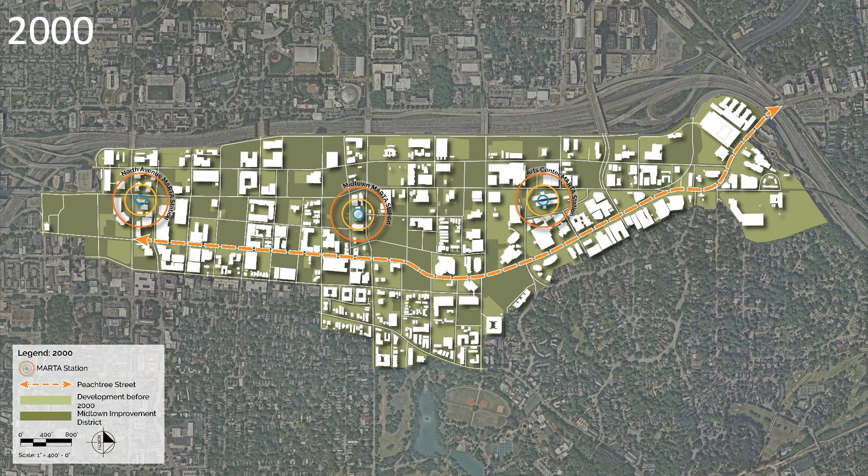So when I started working on Peachtree back in, I guess it was 1997 at this point, the street was very different, right? We were doing a project that was about putting sidewalks together. We were doing a project about creating a thread that began to identify place. And what we've seen, and you've all witnessed probably, is over this last 23, 25 years, that there's been a lot of growth that's occurred throughout the district.

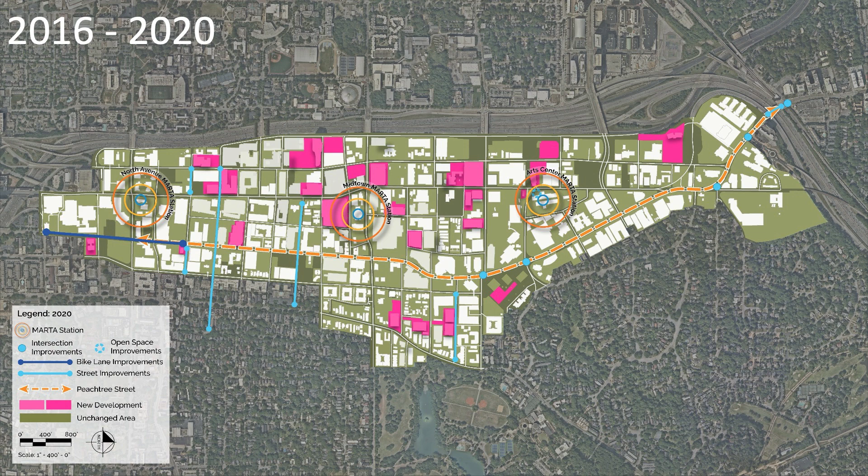And I'm just going to flip through these really quickly because it's not really that relevant when something happened, but kind of where we are now. So we're at a very different point in time than when we originally looked at Peachtree.

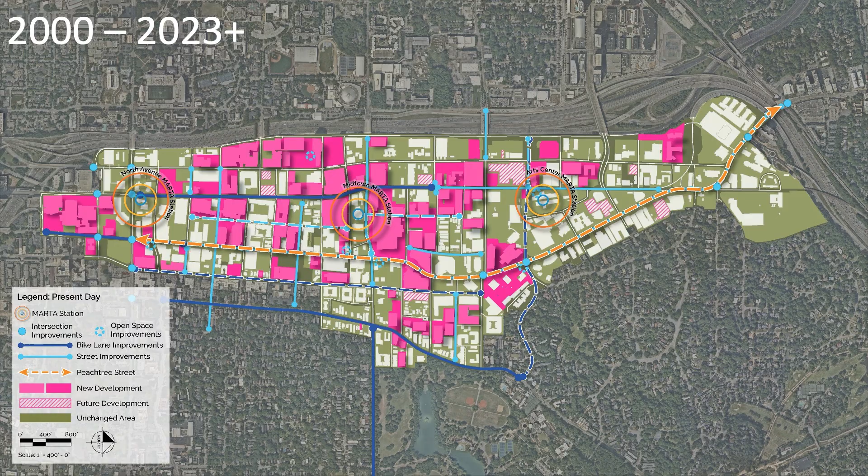A massive amount of development has occurred, but there's also been a lot of investment by the Midtown Alliance within the district, creating a lot of infrastructure systems. And we're now coming up on a point in time with Peachtree where it's a good moment to look back.

And it's getting closer to a point in time where you would expect a more vibrant streetscape, a lot more people out on the street on a more regular basis. And one of the questions that we asked initially is really, where are all the people?

In a lot of ways, Peachtree has this cyclical event time, right? So it's people going to work, people going to lunch, people coming back from work, people walking their dogs. Those are those cadences, that rhythm of Peachtree, but there's not this common thread that there are a lot of people out on the street. And there's a number of different ways that we could look at this. The rise of convenience might be something that's diminishing people being out on the street.

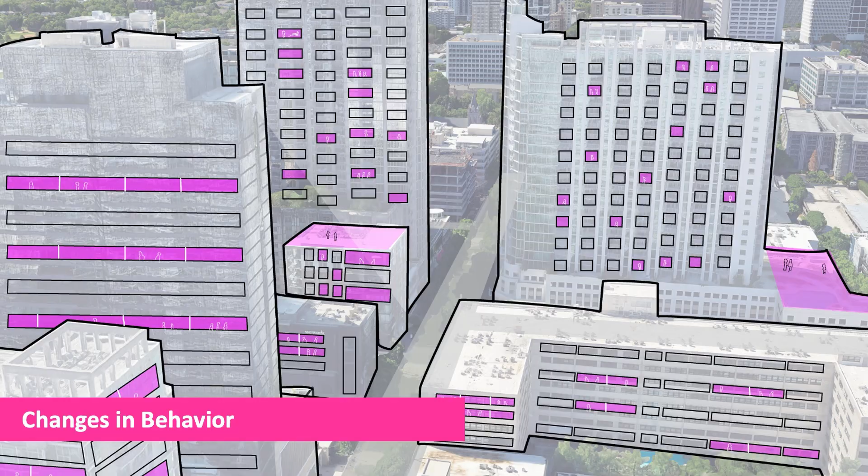I took this picture walking up here to actually check out the space, and there's 5 Uber Eats drivers picking up stuff from Fresh to Order, along with an Amazon truck delivering something from halfway around the world 6 hours after someone asked for it.

There's also changes in behavior, right? The pandemic modified a lot for us. So there's a lot of work from home attitude. There's maybe less people going to work. There's a lot less participation in the public realm that way.

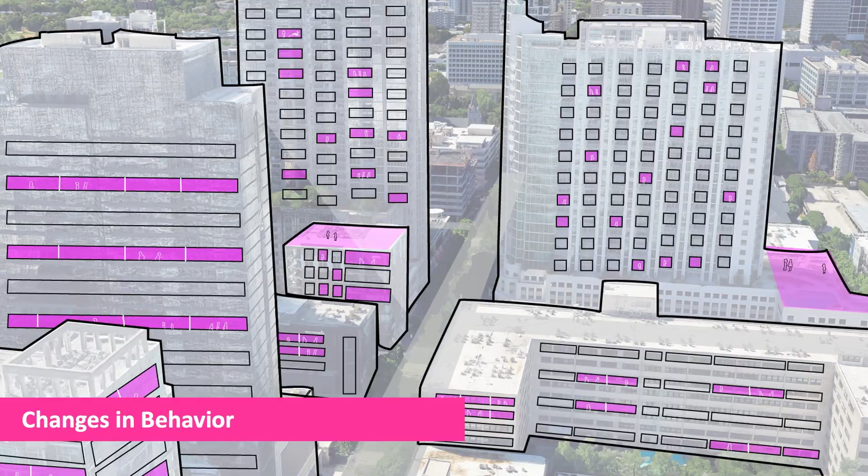There's also some hostility in the edges out there. Dan took this picture. I love it. It was right out in front of AT&T near 5th Street. There's 5 signs right there that tell you all the things you can't do in that space, which is fascinating because I've got an empty retail space and an empty retail space that are directly adjacent to this.

So some of this hostility is really opportunity. It's like, how can we look at those storefronts and look at this space and figure out a way to fill those gaps and create more energy and life?

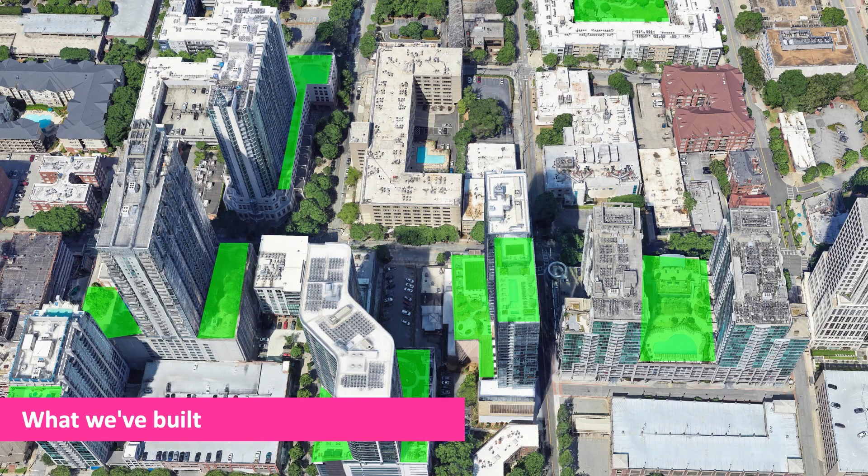I'd say there's also an issue with the way we built Midtown, right? So the common experience for a lot of people in Midtown is, I'm walking down a street, it's retail. Next thing you know, I've got 6 stories of parking before I get to a residential unit. And that's where people are at. We've got highly amenitized sky parks throughout the district

that almost make it where you don't necessarily have to leave your building, right? I can get everything delivered to me. And I've got all this great stuff up here. Why would I ever want to come out to the street? And that's really the question that we're going to be asking you guys tonight: what is going to bring us to the street?

Sustainability, which is a conversation that I'd love to have with you guys this evening because it means so many different things. That's not seen as something that's really reflected within the community itself. And then something that also came out of the Public Life Action Plan is really the empty storefronts, right? It's the shopping and dining options, night spots.

Those things that you would really expect to be able to take off with the number of residents we have here, along with the daytime population that comes in for work. Family friendly is another thing that I think we can hit within the public realm as we talk about these opportunities.

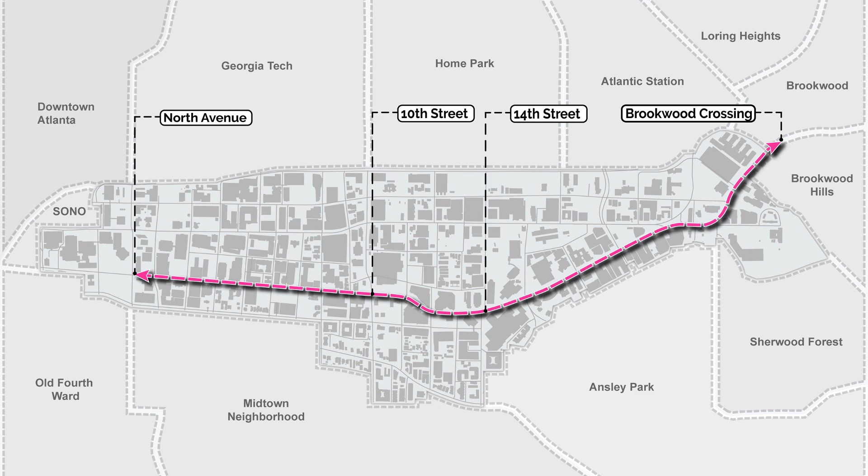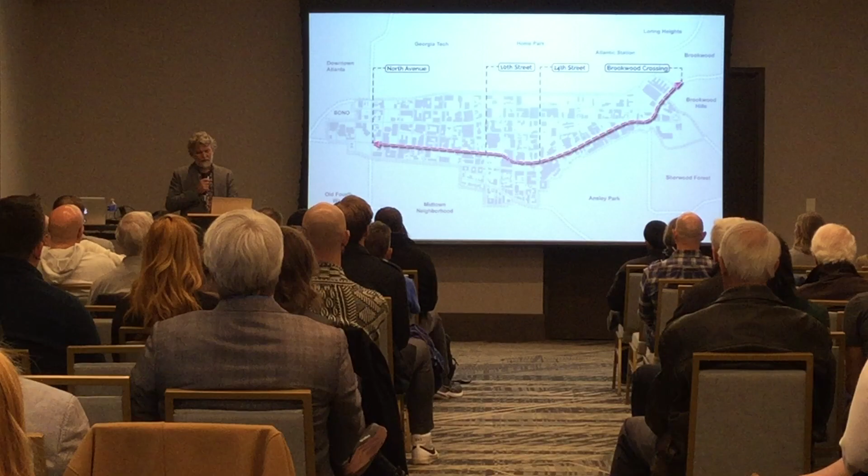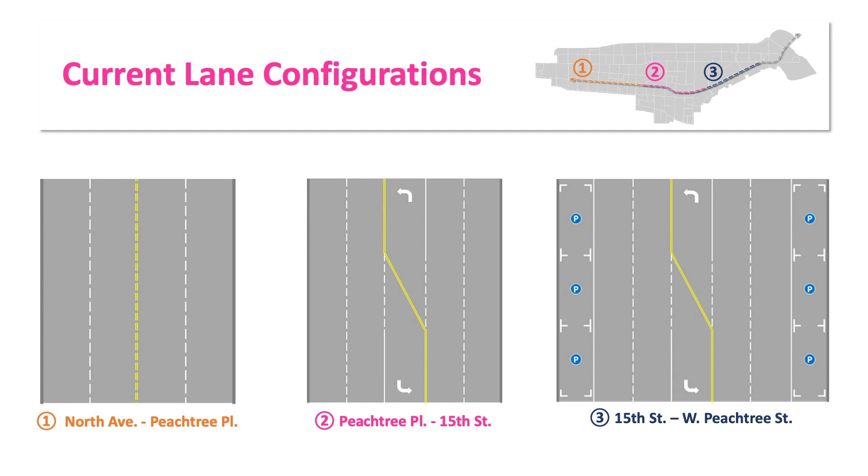So in broad terms, our project is really looking at the Brookwood crossing at 85, at the north, all the way down to North Avenue. And we're gonna truncate this a little bit, because once we get north of West Peachtree, we get into a little bit of a strange land with GDOT and some other operational things. So for simplicity, we wanted to really focus from West Peachtree southward. And these are the current lane configurations that we have throughout the district. Not all of them, but in general terms, this is the way the road is put together, right?

So basically from North Avenue down to Peachtree Place, we've got 2 lanes in each direction. We've got a 4-lane road. Once we get north of Peachtree Place, we pick up a center turn lane most of the time. Once we get north of 15th Street, then we start to add on-street parking.

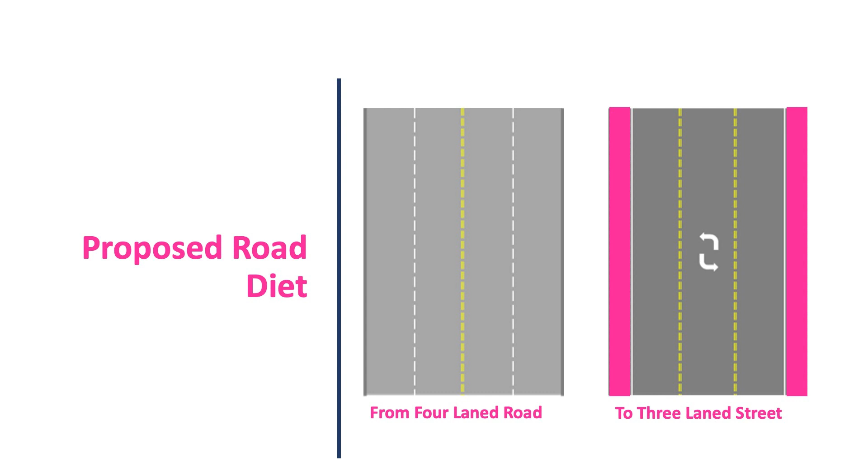So what we're talking about tonight, and what we found within our early analysis, is that there really is an opportunity to put Peachtree on a diet. So going from a 4-lane roadway, 2 lanes in each direction, to a single travel lane in each direction with a center turn lane. This is supported based on the volumes.

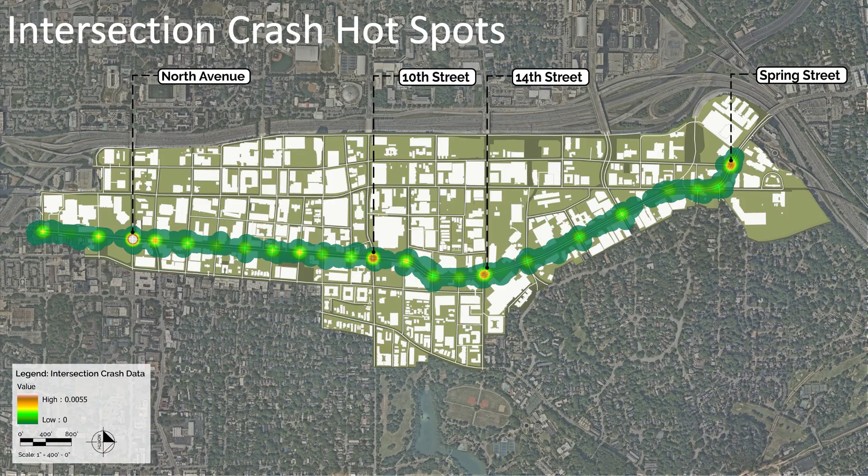It's supported based on the facts that we need to slow traffic down and we need to create a safer condition throughout the district. Now, that's a generic cross-section. We need to look at all the intersections too. There are a lot of different ways that we need to improve safety conditions, but in broad terms, this idea of a 3-lane cross-section is what we're looking at.

This is actually how I got hit by a car in Midtown. And I don't know how many people here have been hit by a car in Midtown. It's not fun. I'm sure many of you have actually been close to getting hit by a car in Midtown. So this really is an inherently dangerous condition.

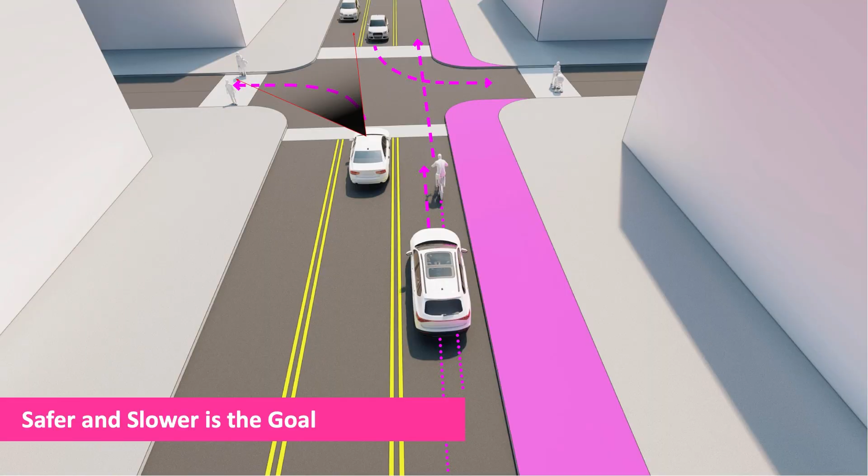The advantage, once we look at going to a 3-lane situation, you'll note that the illegal loading isn't happening here anymore. The supposition and the thought is, if I'm going to be able to park on a curb lane and not impede someone behind me, then I'm going to do it, right? No one's going to stop me. If all of a sudden I'm blocking traffic, that's not something that I feel free to do.

As soon as I align the 2 left turns together, what you end up with is a better situation where I can monitor not only the oncoming traffic to hit that gap, but I can also pay attention to the pedestrians in the crosswalk. So this really is an approach we're taking for the project. We've got the ability to really take Peachtree and narrow it down, which then really asks the question, what can we do with that extra space, right?

So if we think about 4 lanes to 3 lanes in this portion of the district, that's 10 feet, 15 feet if you include the furniture zone. Once we get further and further north, we're picking up more and more space. So it's more and more opportunity. And with that opportunity really is where we're going.

So you've probably noticed that you had some postcards on your chair when you came in. One of the things that we would like for you to do as you hear some of the conversation that Michelle and Darlene are about to take us down, we'd love to have you jot down notes. We'd love to have you tell us what it is that would bring you back to Peachtree to spend time, not just to walk down the street, but to physically spend time. And then other ideas that you may have, great places from around the world, different things that you feel are really missing from the streetscape in Midtown.

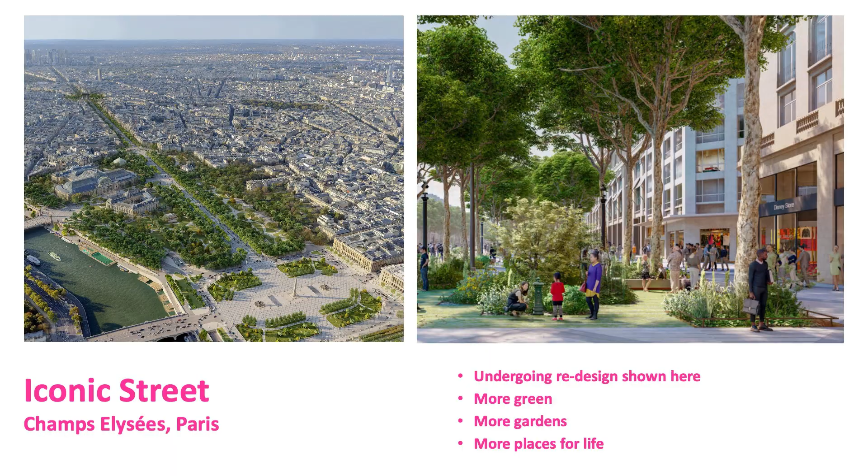So very quickly, I'll just talk you through. We have put together a few examples of streets. There's no one street that is the exact replica that we would ever promote or suggest that we do here, but there are things that we can learn from other places. And we'll run through these very quickly and just highlight a couple of thoughts, but also wanted to ask you as you're listening to jot down if there's a great street or experience or place here in Atlanta or in your own travels that you can share with us that we can learn more from.

So of course, many folks know the Champs-Élysées in Paris, often thought of as an iconic street. And what you may or may not know is it is currently also being re-looked at. And there are great aspects of that street that I'm sure they will not change, and they'll work to maintain the sort of beautiful, symmetrical kind of grand boulevard. But they're looking right now at how to integrate essentially smaller scale spaces, kind of literally at the street level. In a way, you recognize that street for the grand trees and the big moves. So ideas now are being developed on how to invite active life, integrate green and gathering, and it's not wiping it clean, it's adding that in. So that's something we can think about.

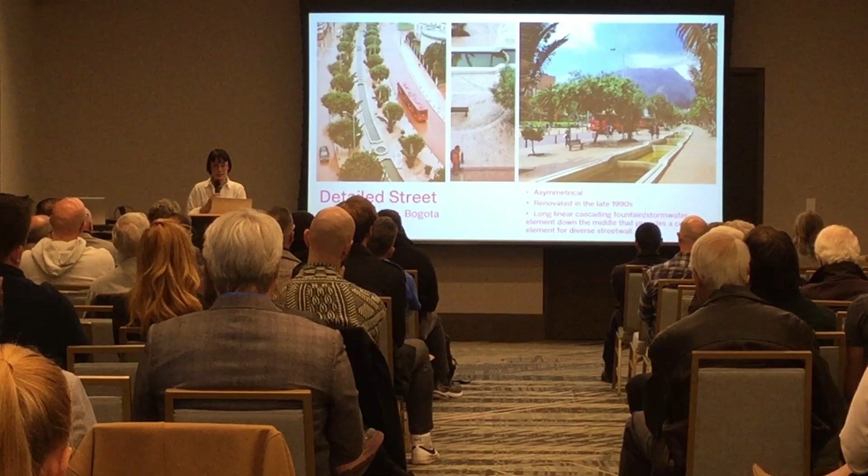This street maybe looks at first glance like it's a sidewalk or just a pedestrian way, but what's fascinating about this is there's this very intense and beautiful planting and designated walkway. On the perimeter of this are kind of standard drive lanes where traffic is able to move, but you feel like there's a place that is a little bit different and really invites a different kind of character of scale and vegetation.

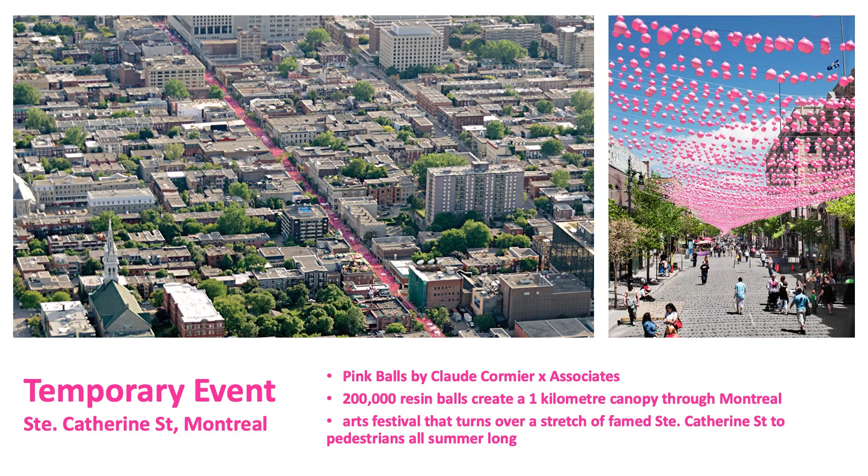And then this last one is kind of looking at that idea of continuity and also inviting culture and energy. So this is an example in Montreal. Continuity doesn't have to be about making uniformity in every aspect of the street, but here you see these kind of what we call the pink balls overhead, which are creating a strong identity, a sense of joy, and responding to this particular neighborhood and reflecting the dynamism of that neighborhood. It creates a sense of continuity, while all along the street there's lots of different activity and different energy happening.

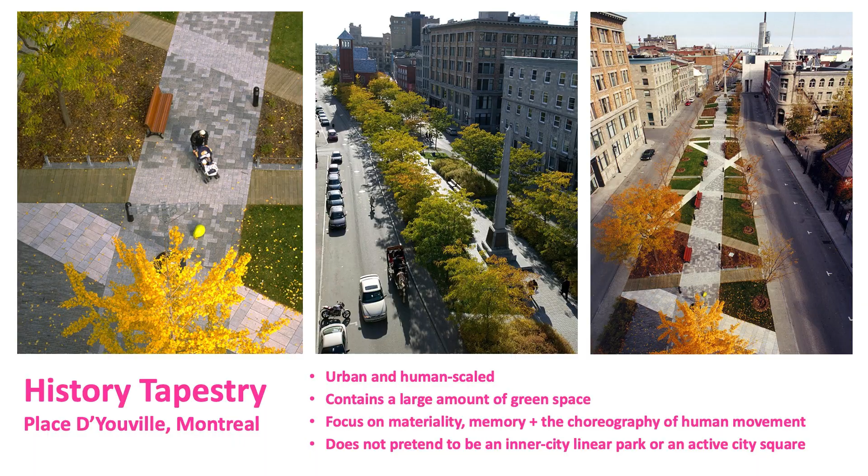And a little bit along those same lines of thinking, there's different ways to bring continuity and celebrate history or culture. And so this is our last example here. There's many more that I hope you share with us. But this one, in a sense, was kind of thinking about this tapestry or a way in which you might introduce a palette of materials, whether that's paving or planting, that can act in different ways and really respond to the immediate context, but also add up to something bigger, something that you recall or you remember or you understand really ties the place together.

So please, again, we're just going to keep asking you for this. We have ideas to share, but we also are very early in this process, and so if there's a place, whether it's a whole street or just a moment along a street that you think of, that you remember, we'd really love to hear about that and learn about that from you.

So now I'll hand it to Darlene. Thank you.

So when we worked with Eric's office, we felt like we were a really good match. We're both multidisciplinary offices, but they took on the charge of describing the quantitative metrics of the street and how this will work. And we had the pleasure of looking at the qualitative ideas around what this could be, what happens when we get more space from a road diet. So we wanted to start to think about how people and habitat kind of coexist on Peachtree.

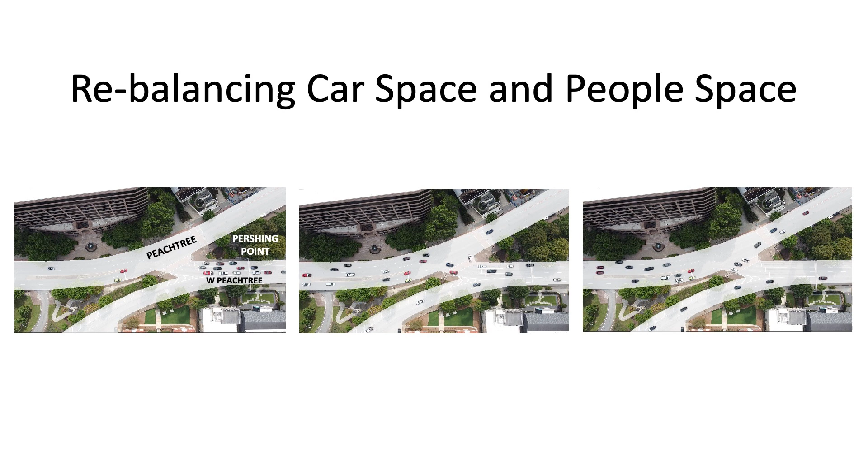So as you can see here, right by Pershing Point, we did these drone shots just to look at and verify kind of the traffic count and all the street space that is devoted to cars. And it was kind of a starting point for us to really think about the space of the street from building edge to building edge and not think of it just as a way of moving through quickly.

And you can see just as a time-lapse kind of film strip of this, that there's just a ton of space that's underutilized. And this is especially a point at Peachtree where people really tend to speed up. The setbacks are larger, the curb cuts are larger, and people are just racing to get onto the highway here.

So this led us to really start to look at the available spaces. If you start to patch all of the contiguous open space together onto the space between just the building facades, left to right, you start to see this very interesting open space. And if you imagine that as a park or a garden, then you can start to laterally think of how we design this. If we don't think of it just in terms of mobility and moving from one end to another, we can start to look at the opportunities of all of these contiguous arrangements around there.

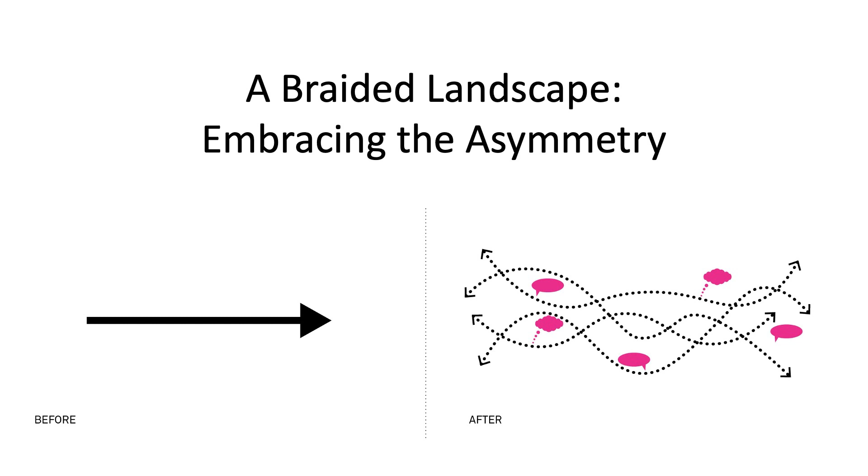We also really loved that Peachtree had this asymmetry to it, that we weren't bounded by kind of the formal regularity of the Champs-Élysées or kind of these beautiful European streets that were designed by dictators, that you have the Terminus and the Arc de Triomphe and soldiers march through.

Oh, it's because I was speaking French. One moment. Siri.

But we love the freeing opportunity that allowed, that we could build on this asymmetry and create this weave with ecology and movement from one side of the street to the other. And again, imagining the whole street, so you're not relegated to the east or the west, but really thinking about those pearls existing in the retail sphere and in the public realm.

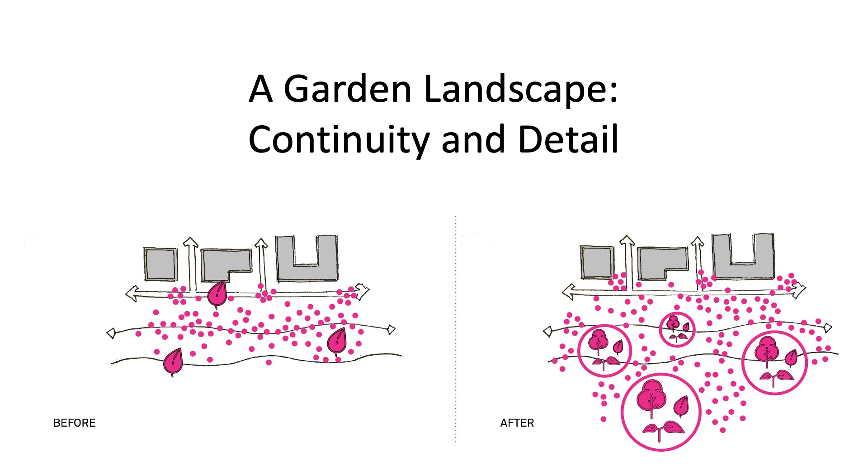And then when we thought about this street and designing it like a garden, we thought about planting it like a garden. That you kind of plant something, you plant a seed of an idea, or you plant something in real life, and it grows and evolves over time, so that you'll revisit the street and see how it's developed, how it's matured, and how the built environment has matured with it.

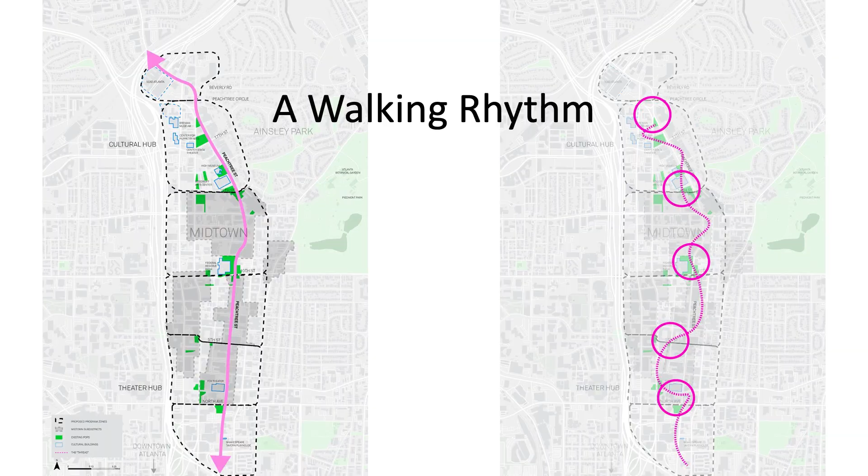And so when we started to look at this walking rhythm, or this string of pearls that we had in mind, we noticed that they coincided nicely with these nodes and these green spaces that are already there. And there were these natural junctures that gave us opportunities to pause, to see what's ahead, and to be interested to explore more.

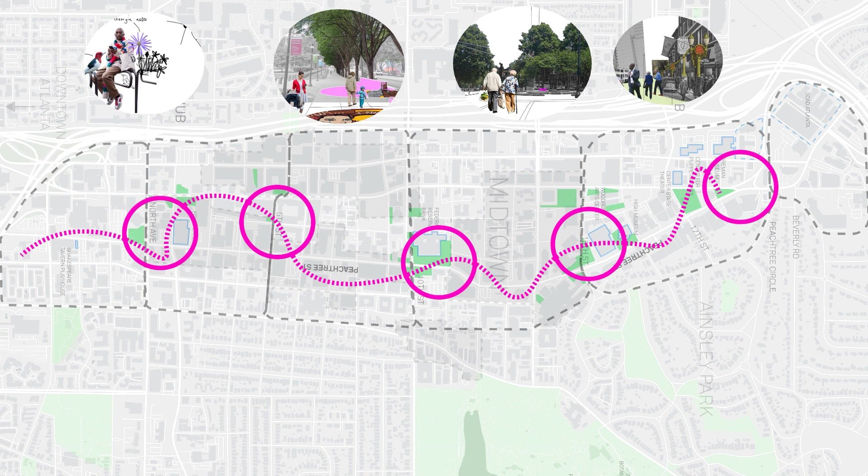And so looking at that again, we created these kind of fanciful collage vignettes and had a lot of fun doing them. But they were about opening up our minds to what could exist there and the opportunities that may be found. So we're inviting you to look at these collages that we're about to show, not as real propositions for what's happening, but to open up our minds and to generate ideas for what you would like to see there.

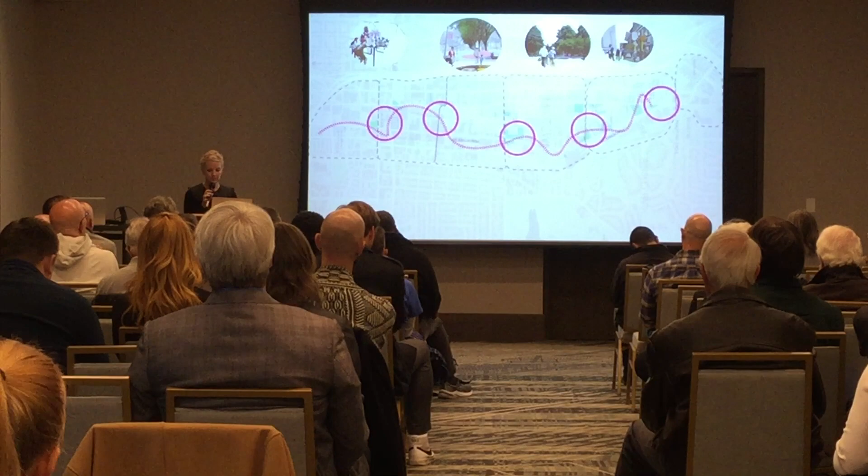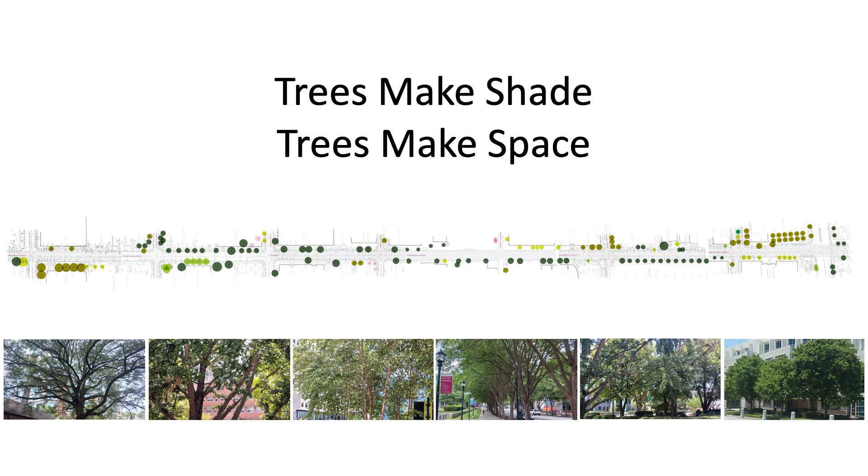So now we're going to go into the opportunities. Peachtree has beautiful trees, and I'm from Canada, and it's an incredibly green and lush and beautiful street. It's not just that it feels shaded and green, but the structure of the trees create these beautiful spaces in themselves. And so we looked at the street like landscape architects creating a garden.

We looked at the existing conditions of the trees and checked the arborist reports, and then mapped all the trees and their species and their configurations and their sizes onto the plan to look at where we could start to understand opportunities for occupying space or adding space on, or to improve these spaces that are already there.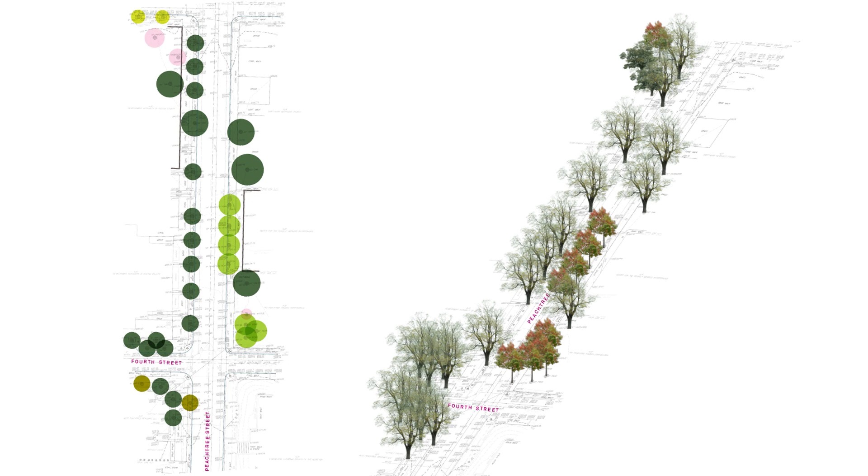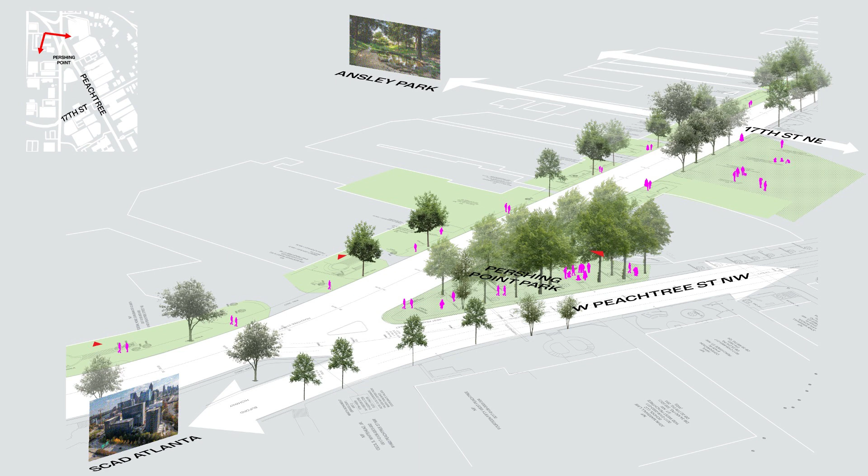So we looked at it in plan first, and then transposed that to an axonometric so that we could see the real spatial relationships. And then we started to design these diagrams, and these are all the existing conditions of what you have there. So if we pull away all the junky stuff on the street, all the signs that you don't want to see, all the trash cans and all of that, if we start to look at just the street as a space and the adjoining green spaces, it's sort of an interesting study.

And so we're going to come back to you with our instigations for these streets now, but these are just the existing conditions to give us an idea of what is possible here. We've also, as you can see, flattened the buildings, and not to undermine the presence of street walls here, but to think about the building as it relates to the street and the ground floor, and how they exist as sometimes contiguous spaces. So in the red triangles, you can see the entrances here.

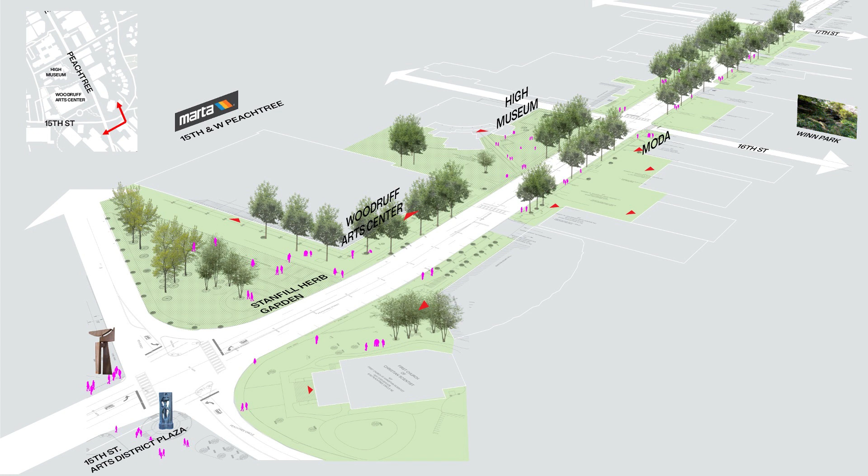And so we're looking at opportunities of how these spaces and the ground floor relate to these open spaces on the street. We're also obviously looking at connections to existing art that's on the street, to MARTA stations, to existing bike paths. And we're really interested in these areas, especially around the High Museum, around MODA, and these underused green open spaces that we walked by today, thinking about freeing the trees.

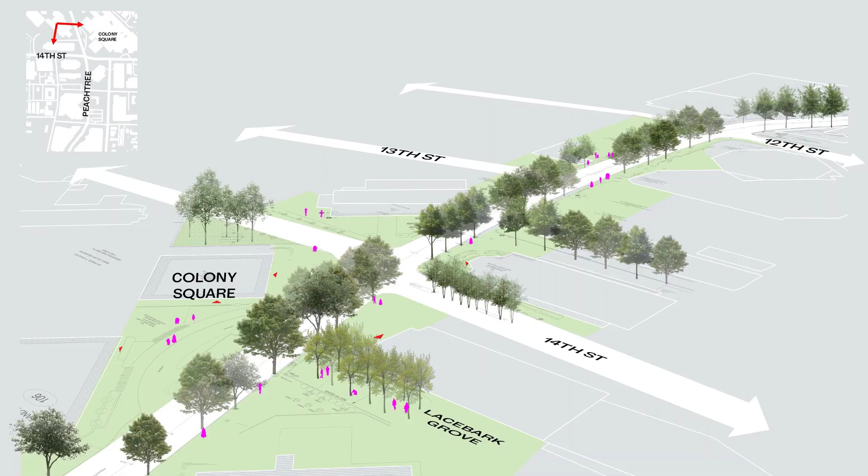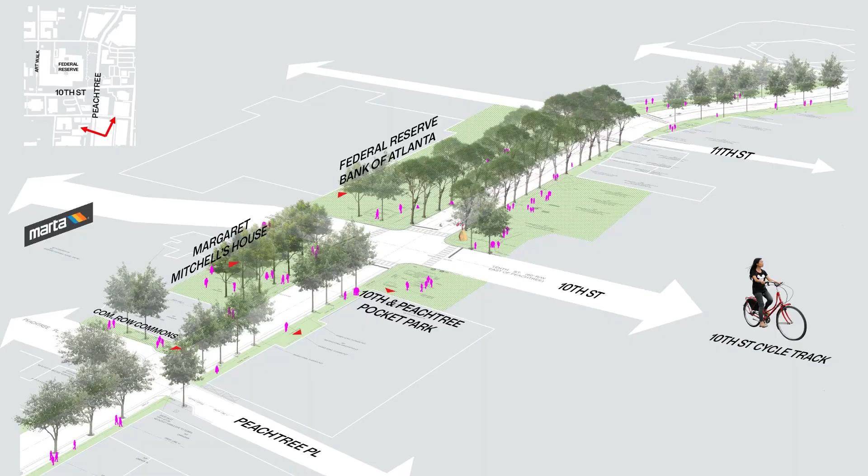And so you look at these spaces, especially the success around Colony Square and across the street, if you think about ping-ponging across that street in this asymmetrical way, you start to understand the opportunities here. We've also represented the street in its correct topographical sway. So it's got this lateral kind of dance move, but it also has the ridge lines that are clearly felt.

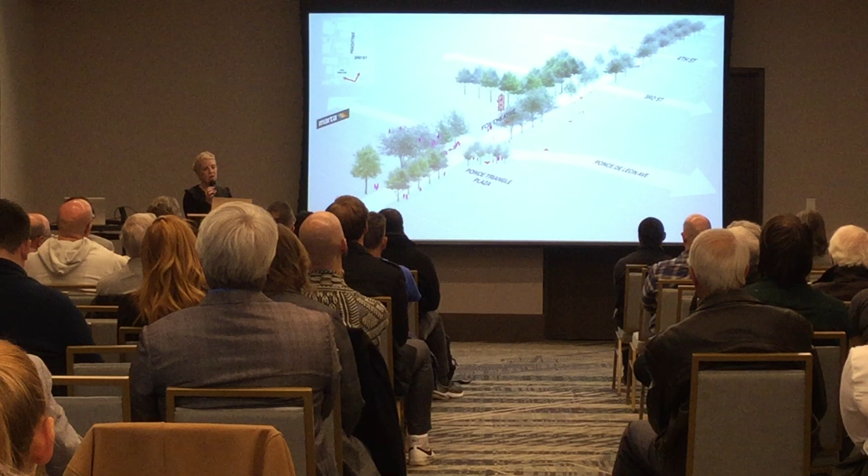And then I think this is the last one. Obviously, the opportunities around the Fox Theater. We've looked at drone shots of people exiting the theater on special evenings, on events, and seeing everyone pour out into the roadbed itself. So obviously, we want to understand the uses of these buildings and historic buildings and how we can support those institutions.

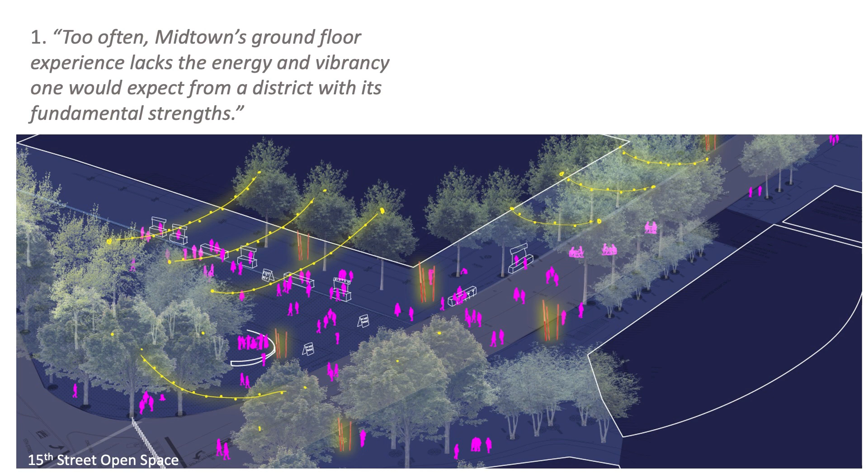And so, as Eric said, this isn't just an independent study. We're building on the Public Life Action Plan, and we see that as setting a framework for this study. And we've taken the 8 key takeaways from the Public Life Action Plan and tried to respond to those in these collages that we're showing here. So, we obviously want to instill the streetscape with energy and vibrancy, through the day and through the evening hours.

And so this collage at 15th Street Open Space starts to talk about how, with very simple means and lighting, we can create spaces that are inviting into the evening. With the residential numbers and the hotel numbers that Eric expressed, there should be a lot more activity on the street and into the evening.

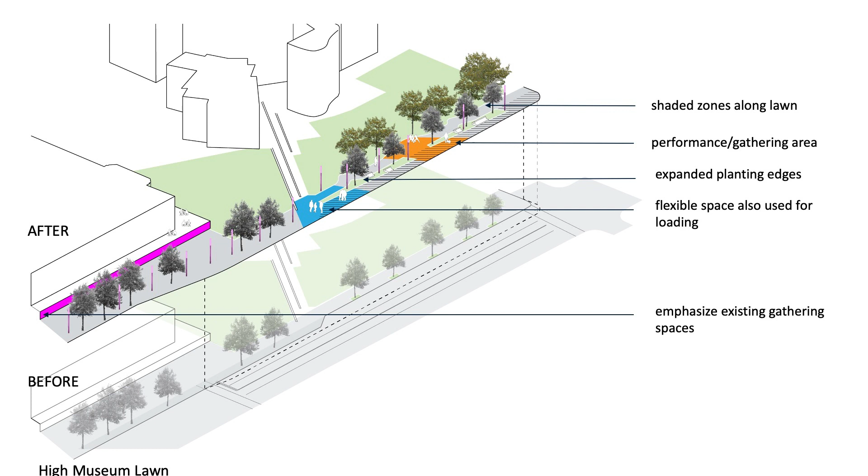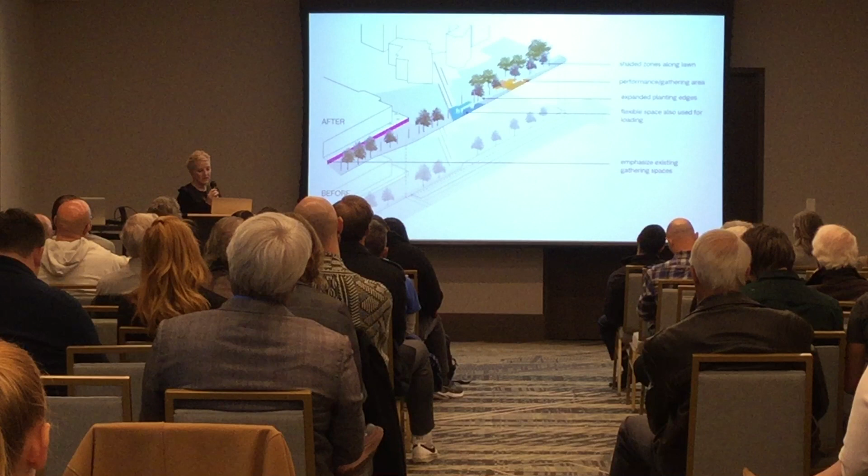Then we looked at these axonometrics, and so you can see below is the before condition, and exploded on top is the after condition. And we're starting to look at how to program these spaces and how to be a little specific about what can happen where. And this is a way for us to start to pinpoint where things should happen and get your impact on those. So, whether there are flexible spaces used for loading, expanded planting edges or performance areas, more shade, they're all things that we want to hear more about.

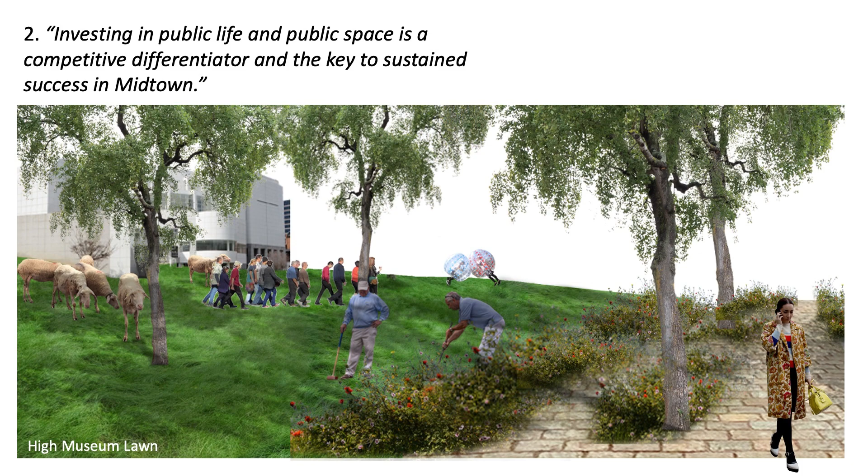This is a really fun collage that we did in the office in the High Museum lawn. We've invited sheep here and croquet players and performance artists. And obviously this isn't realistic, but it was a way for us to really get out of kind of what's happened here before and see what you would like to see happen here. We think it's kind of an underused space and want to dream up ideas for that space.

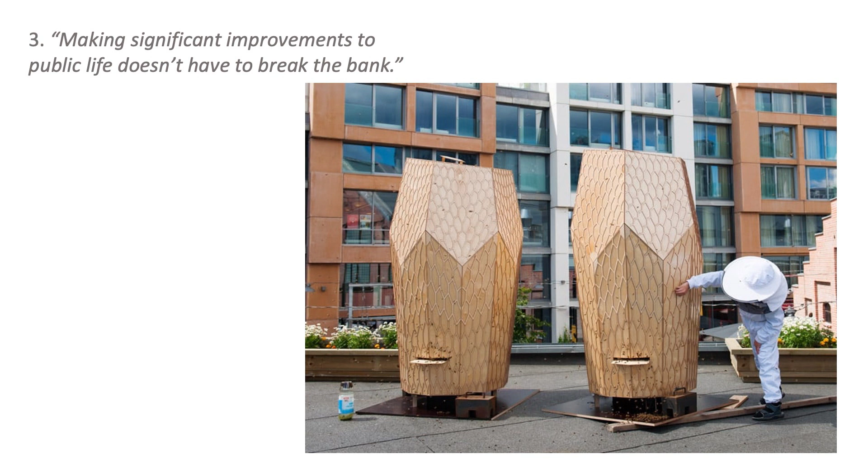We're also looking at things that don't cost a lot of money, not just large moves, but these kind of small moves of biodiversity and habitat and things that bring joy to residents every day. In our office, we designed these beehives that you're not meant to harvest any honey from. They're just for the bees. And they were installed on a rooftop in Norway. So there are little things like this that can bring joy to people.

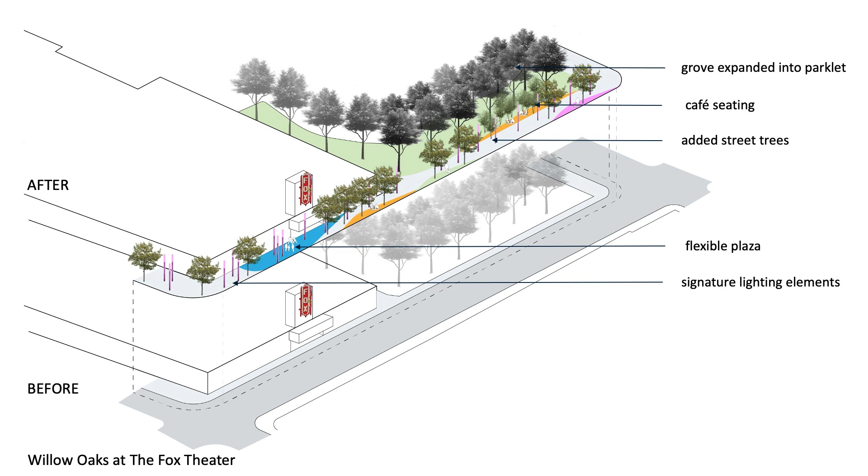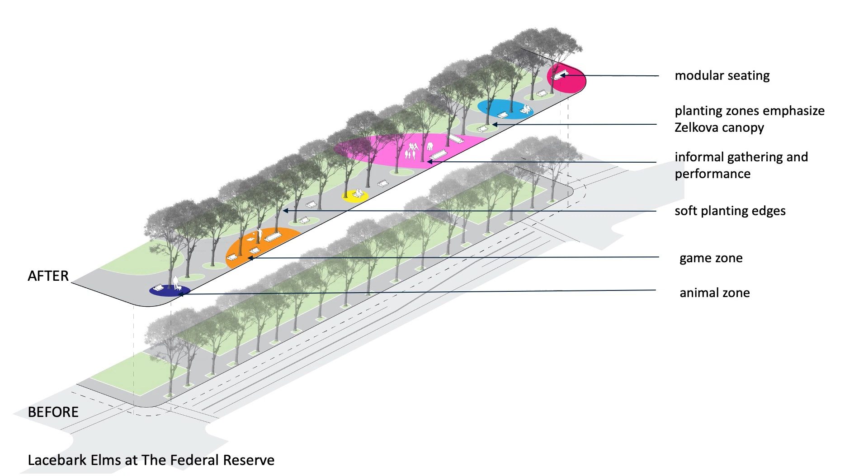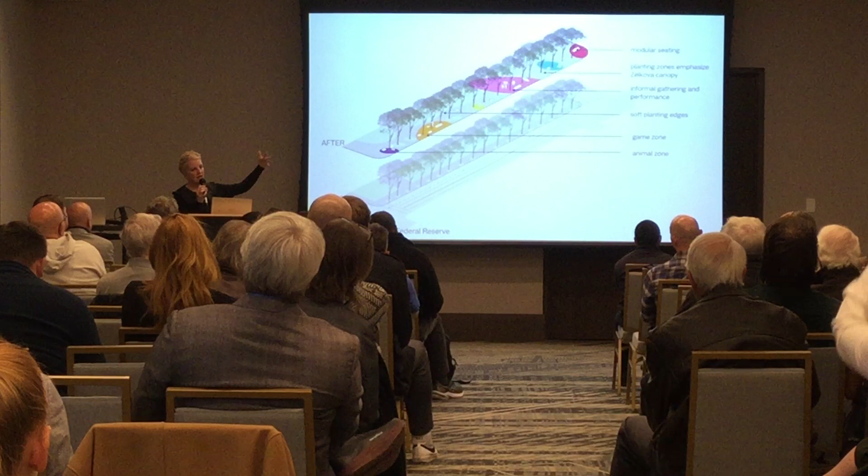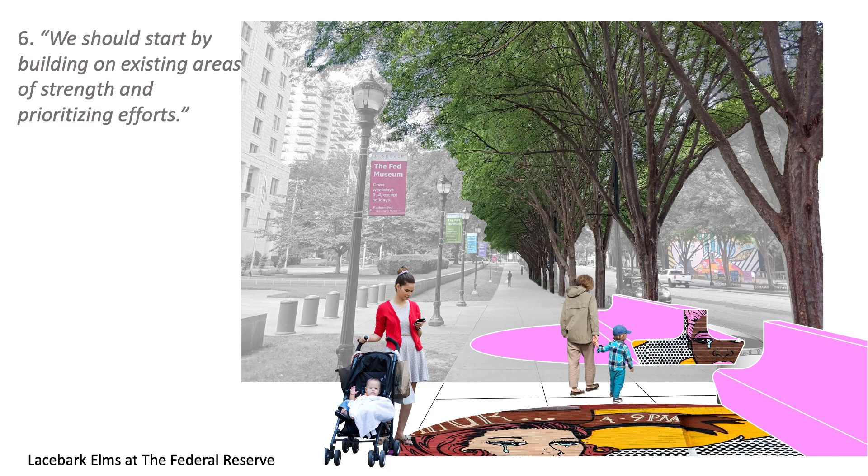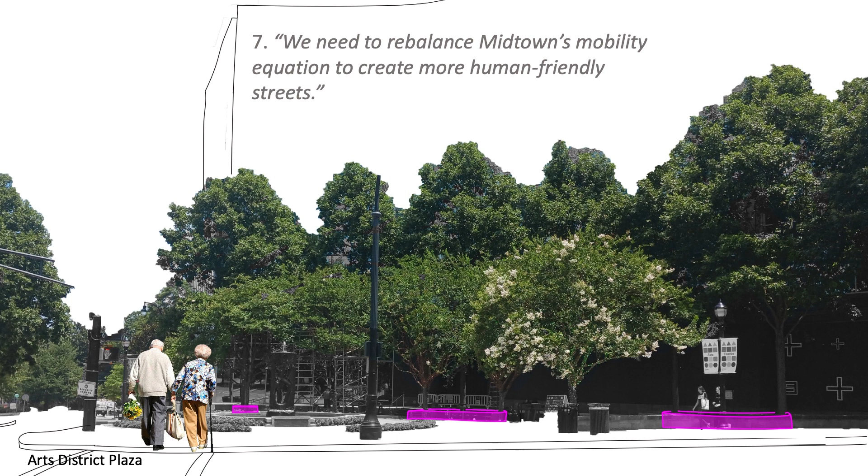And again, these art installations on the ground could be temporary, they could be seasonal, they could be there for an event. And so thinking about how to prioritize space and reprogram space in the street to rebalance it with people and cars. And then again about rebalancing mobility to allow for more human-friendly streets. So we're not just talking about safety here and crossing streets, but actually inviting people with things that they want to see, those kinds of pearls that you're moving towards, and that could be furniture or planting or an area of respite.

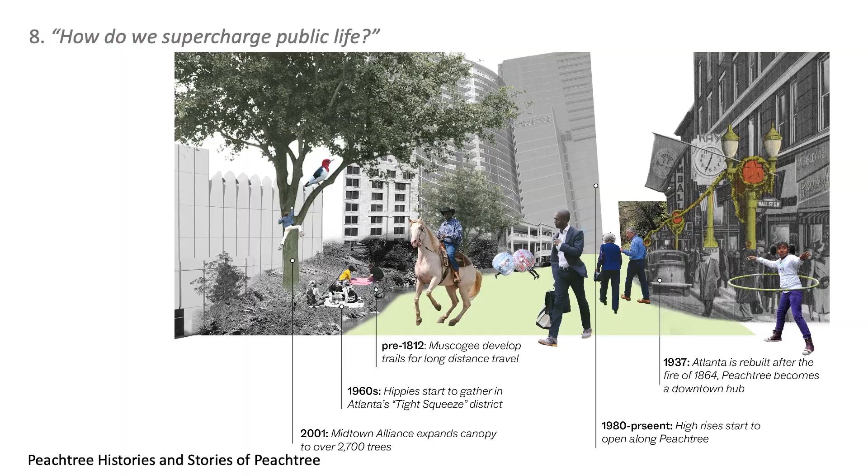And then finally, we created this kind of fun collage about how to supercharge life from Gail's challenge to us. And what we wanted to get out of this collage was not an actual vision of what we're planning, but the idea of taking parts of Peachtree's history and past, whether it's colors or the way that people have used the street or the amount of people on the street, and bringing that into our new design.

And so we'd like to wrap up with these questions about provocation. What do you want to see? How do you want to see your personal histories or the histories that you understand if you're from here or you've moved here? Do you want to see places for plants, places for animals, performances, dance parties, parades, outdoor movies, places for cars, places for car shows, places for community and people? Thank you.

Thank you, Darlene and team. We obviously have a lot to chew on here. I think it's probably become obvious that our approach for this work is not typical for a street design. It's not being led by traffic numbers today, by the engineering. We wanted to get to what do we want Peachtree to be, ultimately. We will get into the engineering part, but that's not where we're starting.